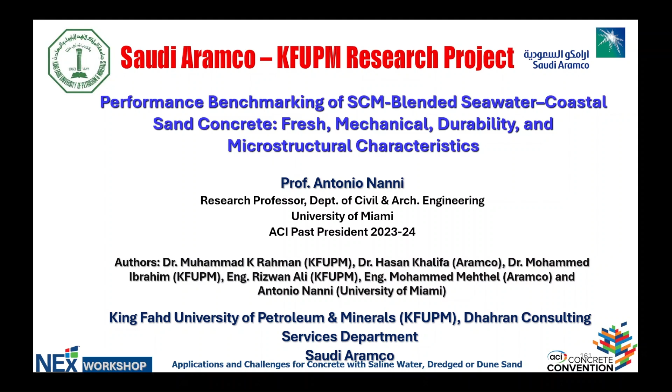This is actually a very exciting project in my mind because it parallels what you have heard earlier about Novus Crete. The emphasis here is obviously on seawater concrete, but in terms of the aggregate it's really sea sand rather than desert sand. This is a project funded by Aramco, and again, very exciting in my mind to look at the use of these non-traditional materials in construction.

So the original presentation was close to 40 slides, so I cut it down a little bit. But I just want to give you the gist of the work that is underway, which is not totally concluded. The presentation breaks down into the typical items: introduction, objectives, materials and method, results, conclusion, and recommendations. I don't want to dwell on the introduction part.

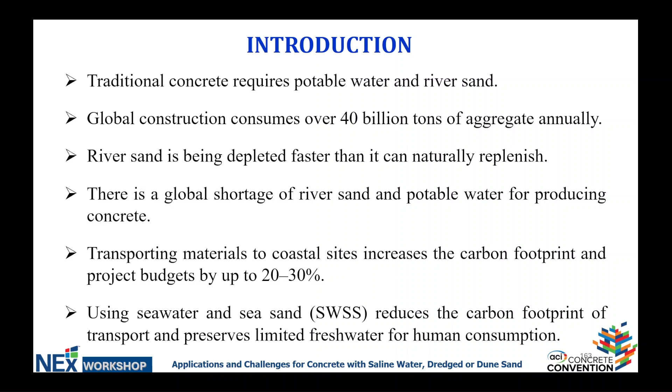We have heard it, and we understand why this is relevant. But I want to make the pitch again for sea sand. This is not only an issue of the Kingdom, but an issue all over the world, particularly in Southeast Asia. The interest in seawater concrete really unites us. Clearly, if you are in the Chicago area, you probably have very little interest in seawater, but as one of the presentations hinted today, there is brackish water, there is brine, there are many types of water that we consider outside the traditional potable or fresh water, which are of great interest to us for this new sustainability paradigm that we have to satisfy.

The objectives here are again very clear. We need to take a look at seawater concrete, perhaps now with the addition of some supplementary cementitious materials. In particular, in this case, we look at silica fume and natural pozzolan. This is one of the possibilities. Obviously, one would wonder, why don't you use also different types of cements? And in particular, you will see later on type 5, or limestone cement.

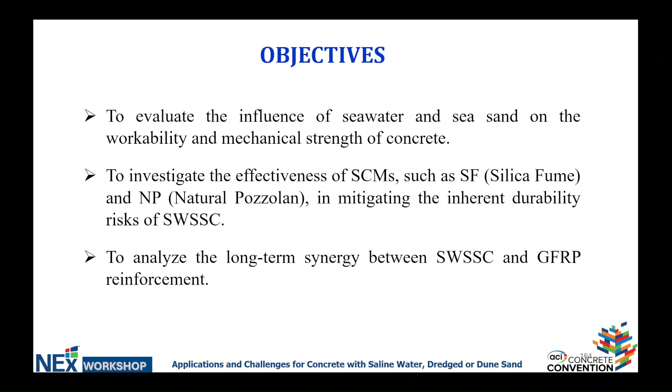I think you have to look at these items as a piece of the puzzle. The puzzle is very complex, and you have different types of binders, different types of supplementary cementitious materials that can be utilized, as in the previous presentation, to perhaps increase the performance of these materials.

This is, in my mind, one of the most exciting slides that I would present today. This gives you an idea of the different salinity of just the Gulf water. What is very interesting, you heard this morning during Ryan's presentation related to the impact of desalination, is that one thing he did not mention is that after you desalinate seawater, you dump the brine back at sea. And look what it does to the salinity of the environment. These red dots have a salinity close to 45,000 parts per million, that is 50% more than traditional seawater.

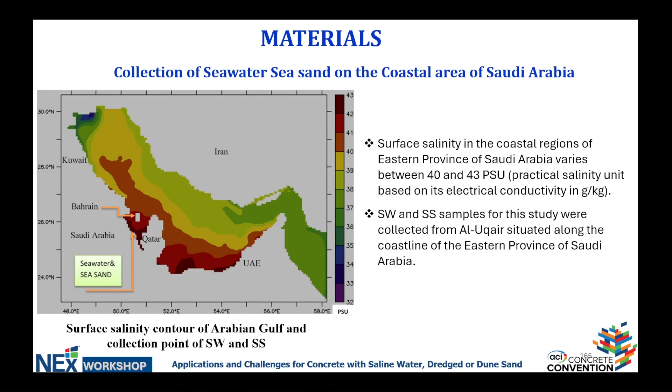So this is really another issue that has an environmental impact of dramatic consequences. It's not only an issue of preserving natural resources, it's also an issue of not damaging with what you do. And obviously we need it, we need desalinated water. But sometimes if you desalinate water to make fresh water for concrete, and then put it back at sea, it seems to be a little crazy, right? So anyhow, I think this is a very interesting item.

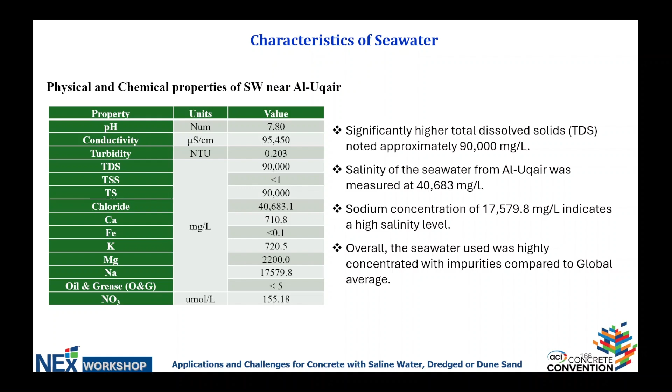In this slide, you see the breakdown in terms of the components of this water, and then you can see the chloride ions being in the 40,000 parts per million range. So extremely high in terms of their impact.

This slide gives you an idea of what is the gradation of the sea sand that was used in this particular project versus the desert sand. You can see the granulometry, the particle size distribution, is very similar in both cases. So there is really, from that perspective, not much of a difference.

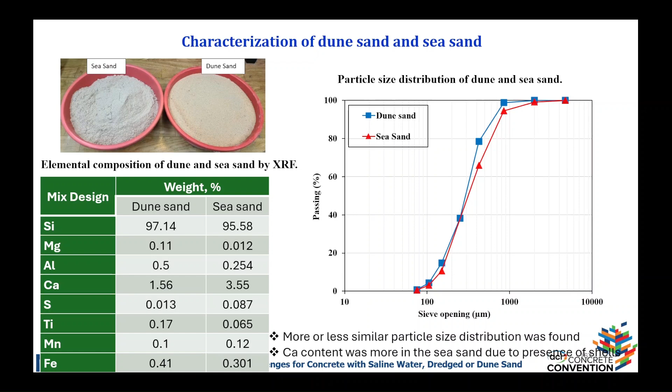There were a few slides before this one that gave you an indication of how this selection was arrived at. If you look at the second row, there is an indication of the constituents of this mix: Ordinary Portland cement, and then natural pozzolan, only using 2 of the items, the silica fume, and this limestone powder that was really intended but then was replaced with sand. And then you see, in this case, PW means potable water, not produced water.

So potable water for the potable mix, then seawater, then the coarse aggregate was the same for all of them, whereas the fine aggregate was, in the case of the conventional mix, regular sand, dune sand, and then sea sand for all the other mixes. In the first column you see the mix details, and the acronyms are pretty clear in terms of what they mean for the constituents.

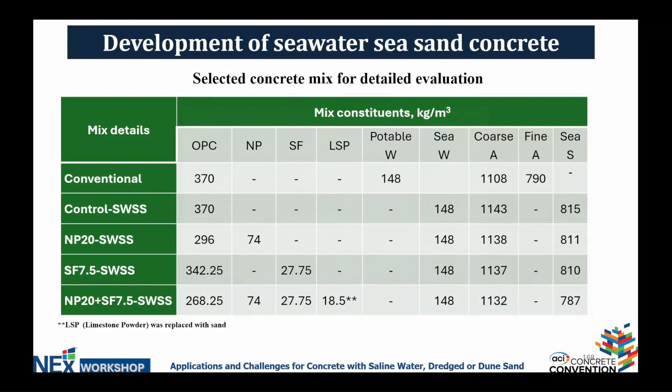But clearly we have two types of concrete, plain concrete and reinforced concrete. The majority of the work, if you disregard flat work, is really reinforced concrete. So the importance of having a reinforcement that is compatible with a mixture so rich in chlorides is very important.

I'm not going to present here the characterization of the raw materials, but I'm going to spend a little time on the other items: the fresh properties, which is a very important topic, hardened properties, and then finally some of the durability issues.

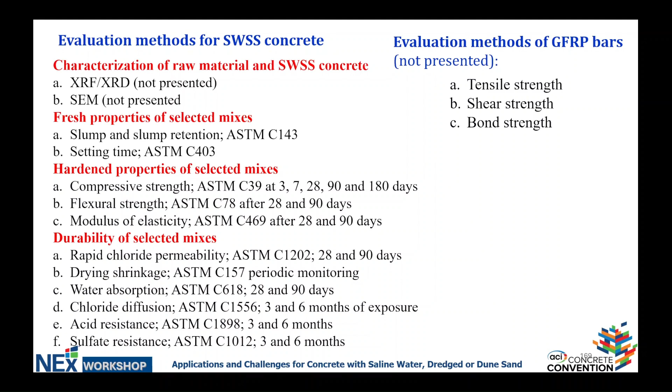We tend to disregard many times the fresh properties, but if you are a contractor, this is really how you make your living, so this is something we have to be cognizant of. This is an area where there's a little bit of confusion in the literature, but in my opinion, this is the part we can impact very easily with the use of admixtures. So let's start looking at the fresh properties here.

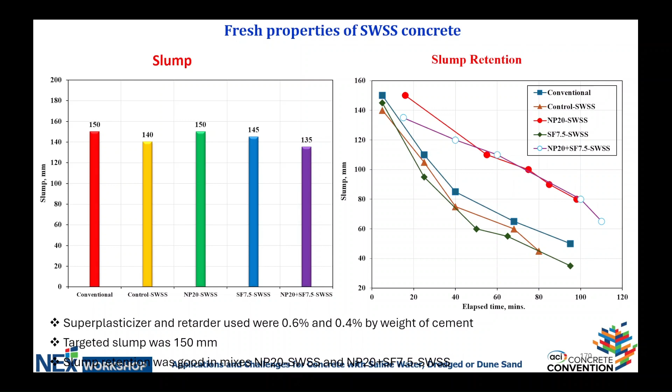This is really important to see what is the finishability of your material, and again this can be corrected with the right use of admixtures. But you need to maintain good slump, meaning good workability, even after the critical time of one hour and thirty minutes, as for example was indicated in the presentation about ACI 574.

Another item relevant to us - I'm going to go very rapidly through this, and I don't think the point is so much looking at the numbers themselves, but having a sense that these materials are really part of what we can do today. This is not the future, this is today, this can be done.

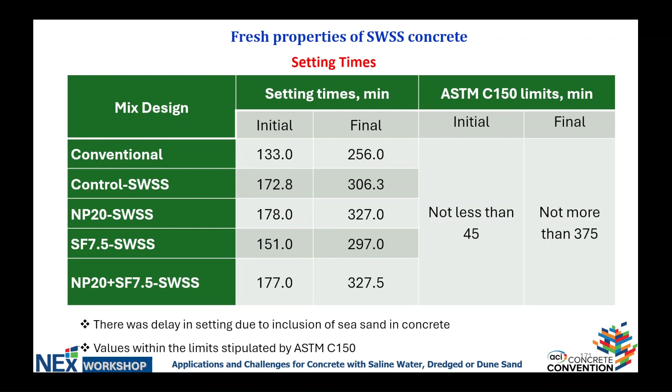Setting time is also very relevant. As you can see here in the first two columns, there is a difference between the conventional mixture and the mixture with seawater and sea sand. But at the end of the day, what is important is that we are within ASTM standard C150. That is really a measurement of what is important to us.

One of the findings, currently being investigated, is really a weakness at the interface between the aggregates and the cementitious paste. This is more than the seawater - it's really an issue probably due to the sea sand. This is an item being investigated, and some of the SCM work being done now will shed some light on it.

What is interesting is that the flexural strength has not really changed. So the ability of the material to perform under tensile stresses apparently is not affected by this weakness at the interface.

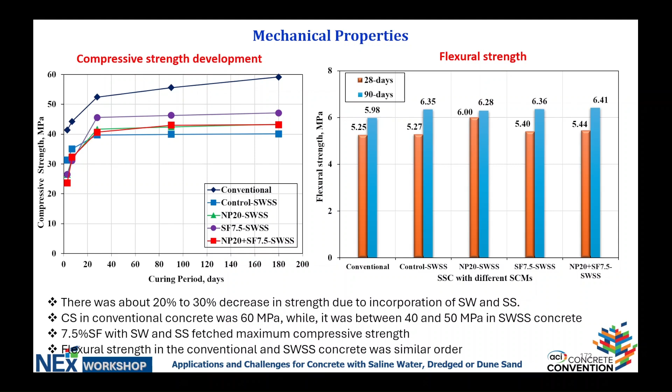Durability, depending on how you measure it - there are many ways to do it - water absorption could be one of them, and as you can see here, there is not much difference between the mixtures. But if you look at water penetration, the mixture that only has seawater and sea sand is obviously the one most affected by water penetration.

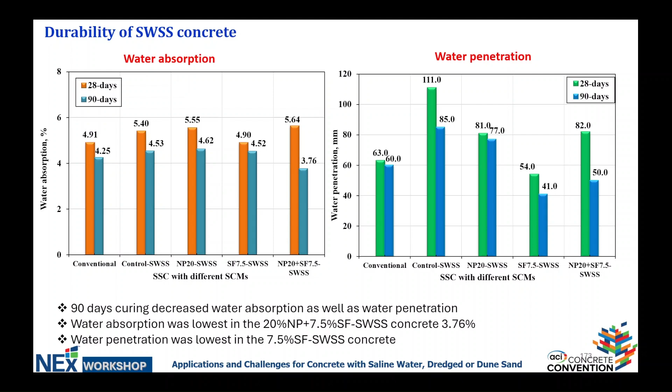If we look at another very important property, fundamental particularly for flat work, especially if you are not reinforcing it - slabs on ground, where it seems this material could have great potential - that's shrinkage. Drying shrinkage is one of the items we need to look at.

Definitely there is more shrinkage in the case of the mixtures we said are non-conventional with respect to the conventional one. Again, this is something that can be corrected with the proper use of admixtures, or with a more targeted use of the binders themselves, through substitution of some of the binders.

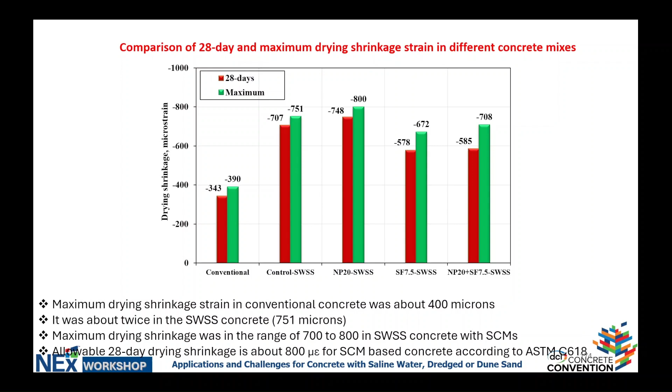The chloride diffusion, I think Osama spoke to that issue very effectively. Why is this important to us if we don't really have steel in it? But it's a very good indication, even though it was developed for steel, of the quality and durability of the concrete itself.

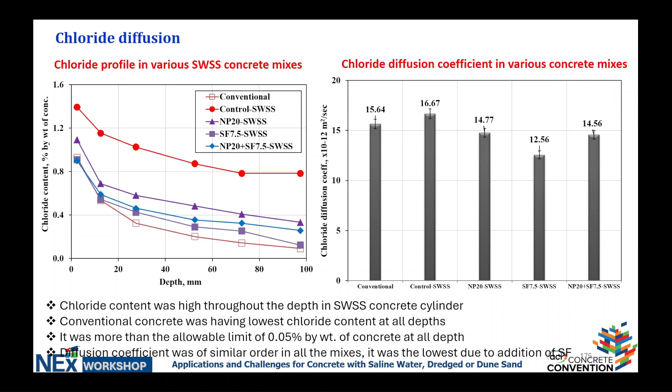Here you can see for yourself what are the differences between the two. It's kind of interesting to see what the chloride profile is. There is a very significant variation between the benchmark and the other four mixtures, but in terms of the chloride diffusion coefficient, basically they are all the same.

One of the things that we tend to not be cognizant of is the sulfate attack, and this is really something that we need to pay, in my opinion, quite a bit of attention to. The sulfate attack not only comes from the presence of sulfates in the seawater, but also if you have this concrete in contact with sulfate-contaminated soils. So this is something that we need to look at.

Clearly, in the case of the four mixtures that we selected, there is not a very good performance in terms of sulfate attack. This is measured by weight loss in concrete, and this might also result in reduction in compressive strength after this measurement of sulfate attack. So I think this is something that needs to be corrected and looked at, because it's certainly an issue due to the sulfate presence in the seawater itself, and particularly if you have it in applications like slabs on ground with sulfate-contaminated soils.

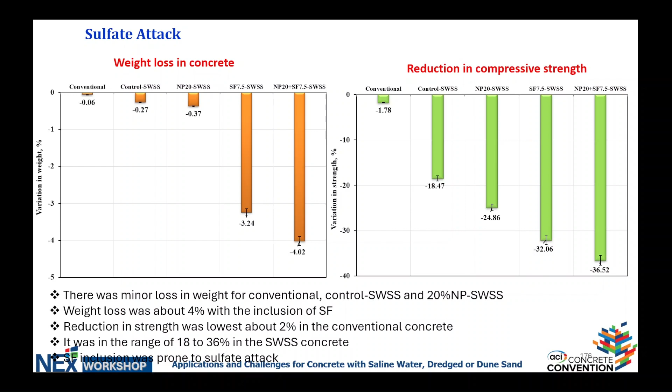Then looking at the GFRP, I kind of repeat what many colleagues have already mentioned, and this is not really the topic of today, but what is important to state is that even though we have demonstrated the durability of GFRP in particular, which is the focus of this project, under conventional concrete mixtures, there is really no major difference if you add seawater or sea sand to the mixture.

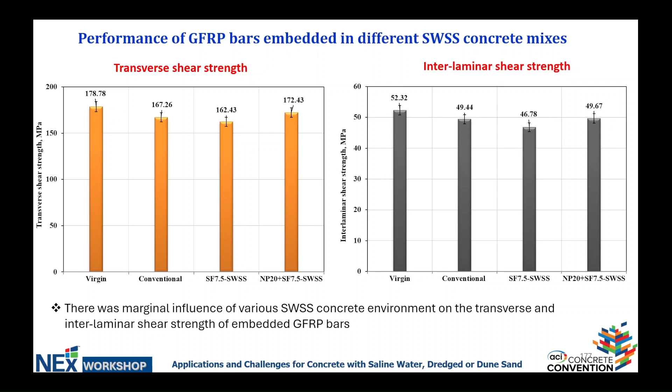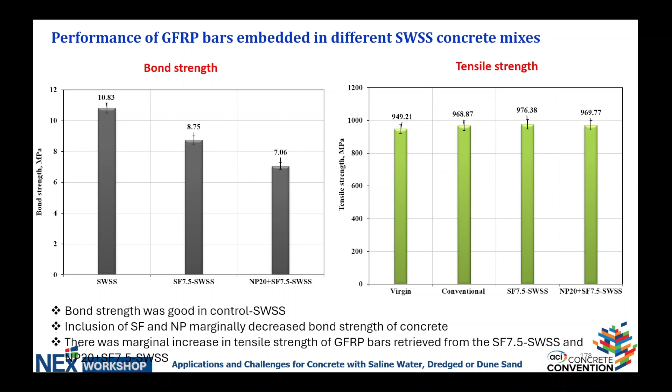The only area where there could be some slight difference is in the bondability of the concrete. This is a property of the concrete, not really related to the GFRP itself. Being cognizant of that, this might have an impact on some of your parameters such as development length, but I don't think this is an issue. If you expose the bars to this more aggressive environment in terms of tensile strength, you don't see a difference.

So some conclusions, because I know that I'm the only person that separates you from an important lunch, and in my case from a board meeting, so I cannot be late.

The characteristics of the sand itself were not different from what we expected, and we don't have any major issue. But remember that not only in the case of seawater, but in the case of sea sand, or desert sand, we need to be cognizant that these are regional issues. You cannot generalize and say all sea sand is applicable, all seawater is usable. So as you look at sustainability, sustainability is also regional, okay?

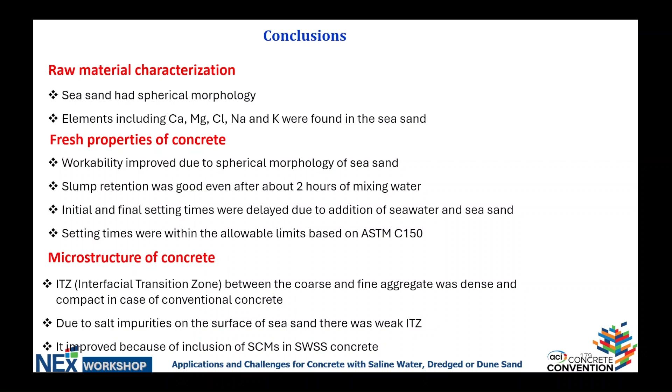The fresh properties of concrete, I mentioned the workability, but it seems to show absolutely no problem. In this case, I think the right mixtures were used. In terms of microstructure, we have identified, particularly through the work that Dr. Kalim has done at the university, that this interfacial transition zone seems to be the culprit of some of the degradation of strength that we have seen.

Mechanical properties, this is kind of a repetition of the previous point. If you have an ITZ that is problematic, that obviously translates into less strength. Interesting in the compressive strength rather than the flexural strength.

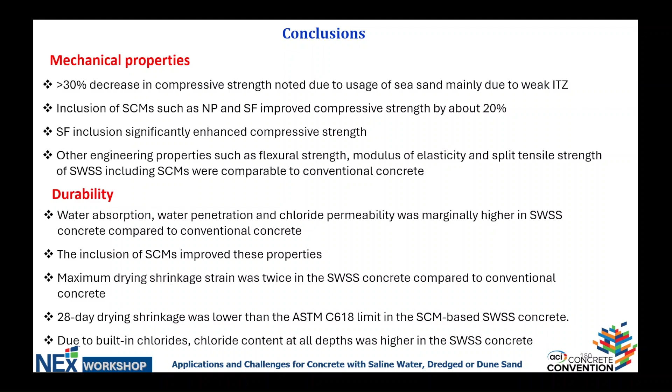In terms of durability, I think the shrinkage can be easily corrected if you pay attention to what you put into the system. The part that is, in my mind, a little more concerning is the issue of sulfate attack, for which we need to be cognizant and really make an effort to correct it.

The performance of GFRP in SWSS doesn't seem to create any problem. So I think we're very much excited about the project that Novus Crete will have shortly at NEOM, where some of these materials will be used.

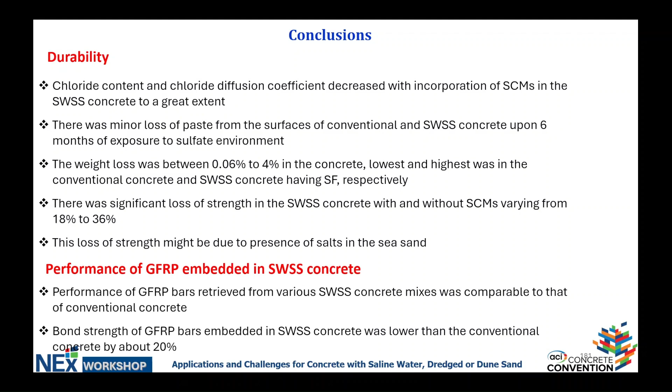And then there are some recommendations. I would only invite you to read the very last one, which I think is very important, that indicates we still have to be cognizant of what we're doing in terms of generalization. In particular, if this sulfate resistance is an issue, for example, the use of a type 5 cement could address the problem.

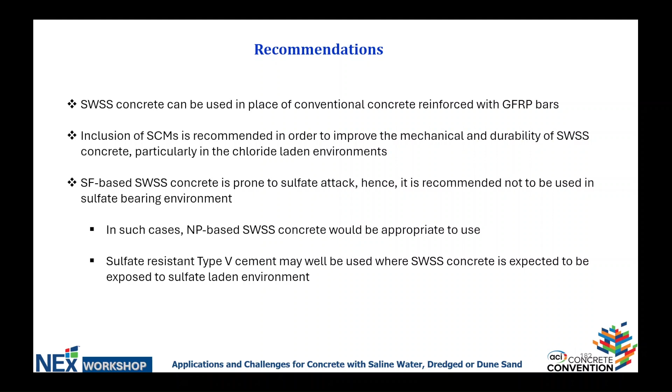We are a little bit out of time, but maybe one question. Go ahead.